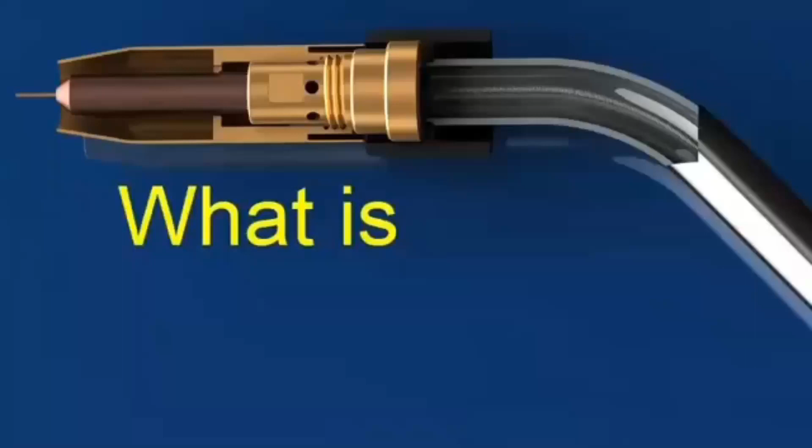What is MIG welding? MIG stands for Metal Inert Gas Welding. The American Welding Society calls this process gas metal arc welding, or GMAW. You might also hear it called wire welding.

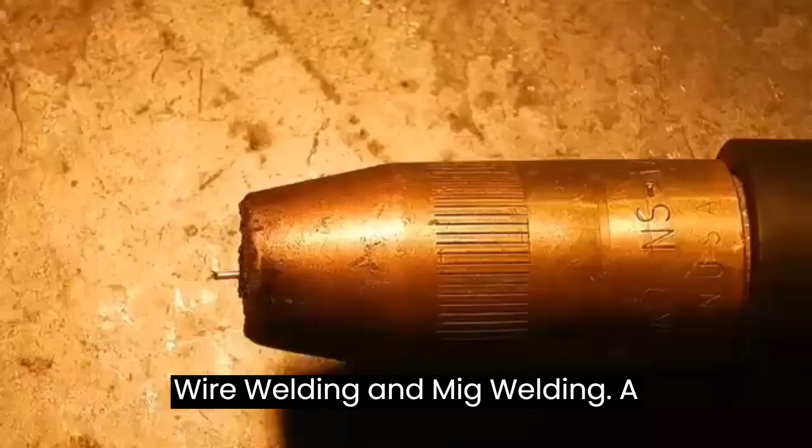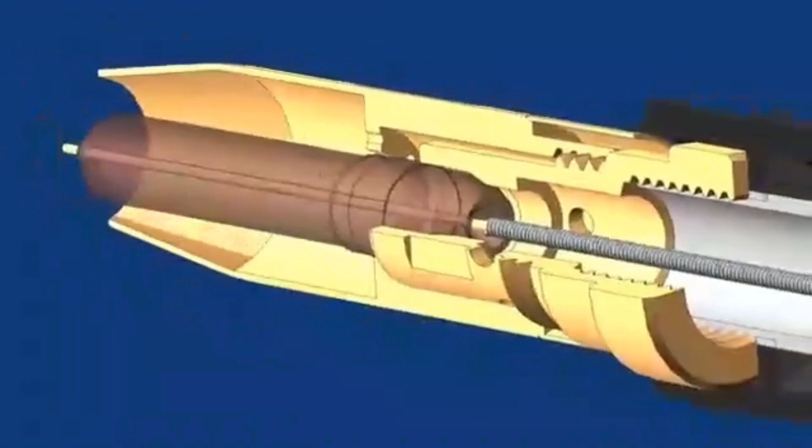In MIG welding, a thin wire acts as the electrode. This wire is fed from a spool mounted on a gun or inside the welding machine, through a flexible tube, and out of the nozzle on the welding gun or torch. The wire is fed continuously when the trigger on the welding gun is pulled.

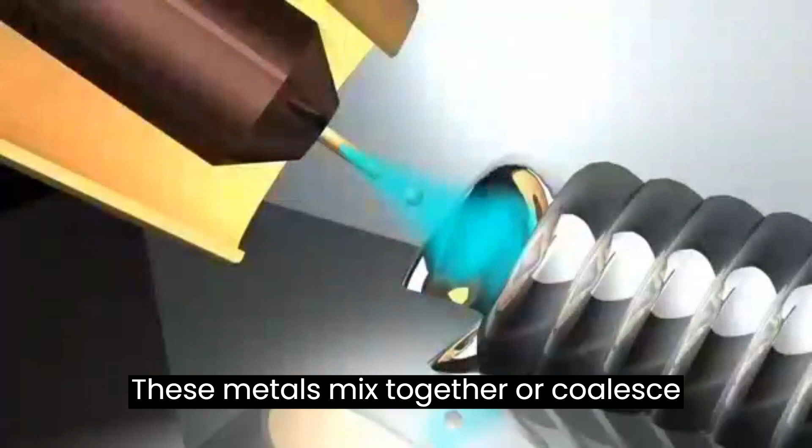When this trigger is pulled, it also switches on the welding current and a shielding gas. An electric arc forms between this wire electrode and the workpiece and heats both metals above their melting point. These metals mix together, or coalesce, and solidify to join the workpieces into a single piece.

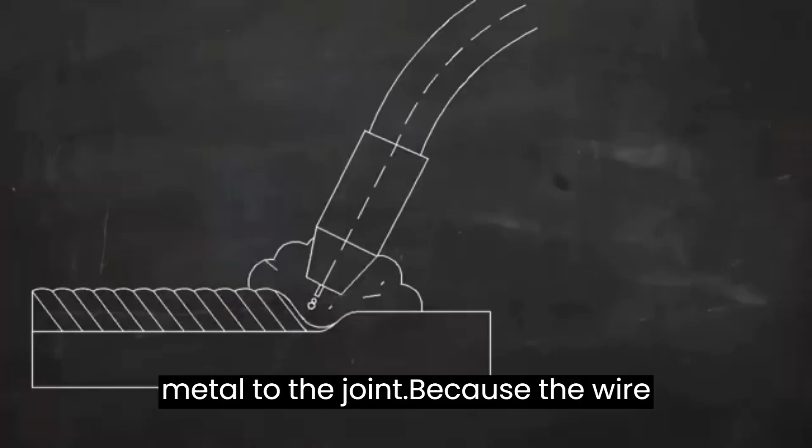The metal in these parts to be joined is called the base metal, and the metal that comes from the melting wire electrode is called filler metal. MIG welding always adds filler metal to the joint. Because the wire electrode melts as it's being used, MIG is called a consumable electrode process.

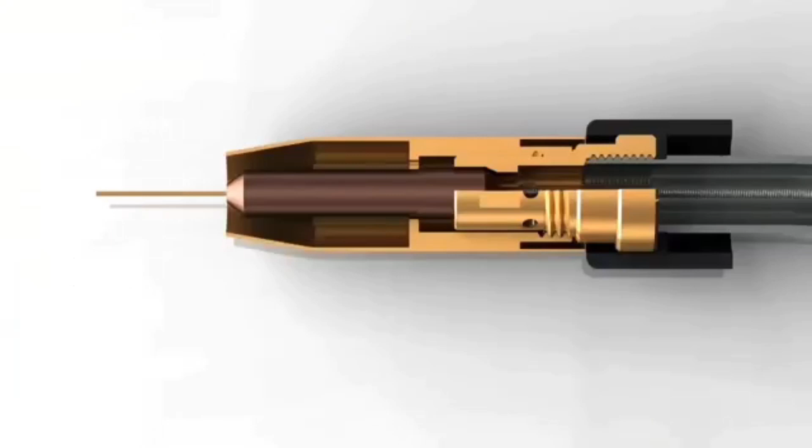Here's the MIG wire going through the wire feeder into a flexible tube or conduit liner. The liner goes through the hose or welding lead all the way to the torch nozzle. At the nozzle, the wire is fed through a contact tip and comes out at the point of the weld.

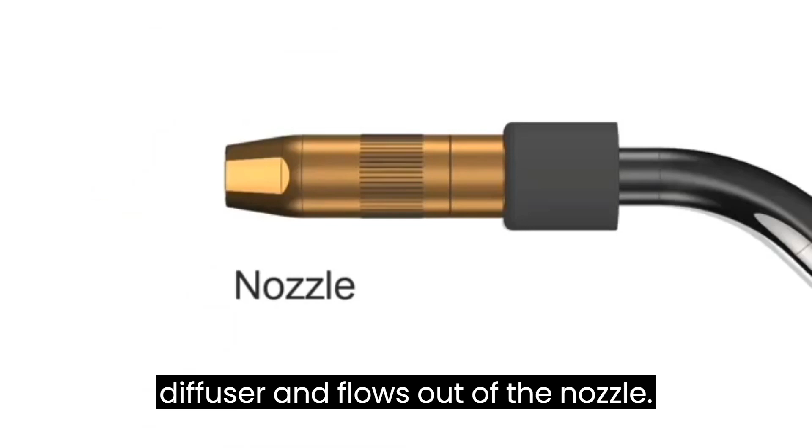Shielding gas is also fed through the welding lead. It goes through a gas diffuser and flows out of the nozzle. This shielding gas, which is often a mix of argon and CO2, protects the molten metal from reacting with oxygen, water vapor, and other things in the atmosphere.

In MIG welding, all the machine controls are set on the machine itself. The most important of these are polarity, wire speed, and voltage. The trigger on the gun is just an on-off switch.

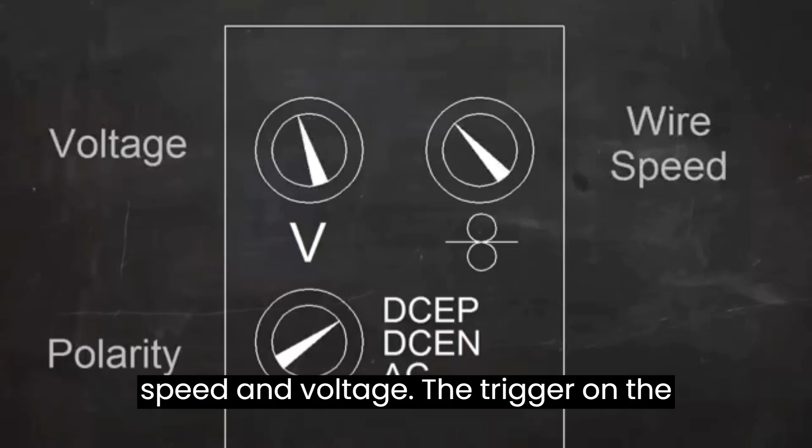For most MIG welding, the current is direct current, or DC. DC is like the current flowing from a car battery. One wire is always negative, and one is always positive. In DC MIG welding, the electrode is usually positive and the workpiece is negative.

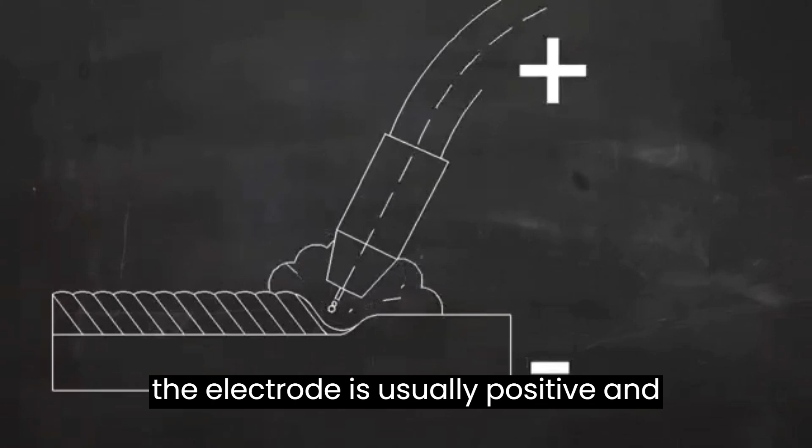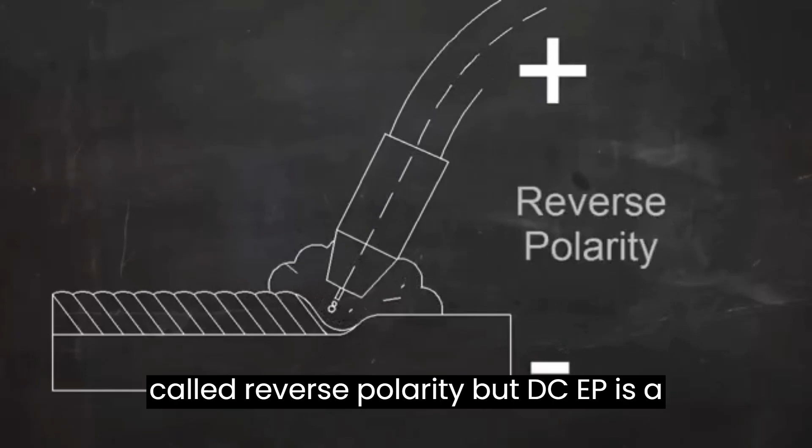The term DCEP is used, indicating that the current is direct current and the electrode is positive. This is also called reverse polarity, but DCEP is a more descriptive term.

In an electric circuit, the current flows in a loop. In MIG welding, the current has to flow in a complete circle from the machine to the torch, into the work, and back to the machine. A work lead is clamped to the work to complete the circuit from the workpiece back to the machine.

So, in summary, MIG welding is an electric arc welding process. It uses a consumable wire electrode, filler metal is added automatically, and the shielding gas comes from a high-pressure cylinder.